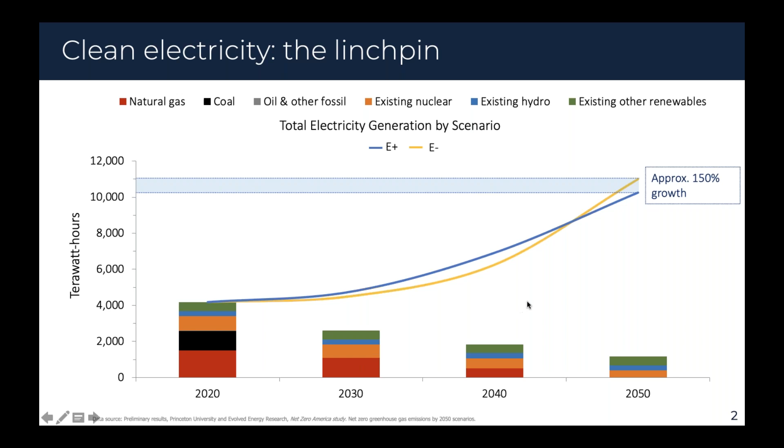So if we take the gap then between the line here, which is the total electricity demand in each of these scenarios in each year, and the remaining contribution from the existing generation sources, what we get is the new amount of total carbon-free electricity generation that has to be added to the US grid over time. So to give this some context, here is an overlay that shows the total 2020 generation today from all carbon-free electricity sources. So all the hydro, wind, solar, nuclear, et cetera, across the country.

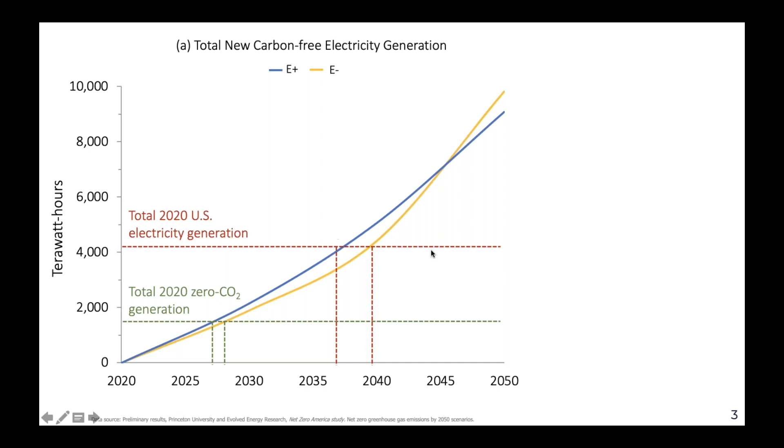And on this trajectory to be on track to a net zero economy-wide goal by 2050, we essentially have to build double all of the existing low carbon generation or zero carbon generation in the country sometime before 2030. So within the next 6 to 7 years, we need to be adding the equivalent of all existing low carbon generation to the grid in the form of new carbon-free electricity sources. Then sometime between 2037 and 2040, we have to basically double the entirety of the current US electricity grid worth of electricity generation, all from new carbon-free sources. And depending on the pace of electrification, basically do that all again by 2050.

Clearly, this is a daunting challenge. If we think about the scale and pace of deployment, it is quite unprecedented, and it is why focus today on the right policy and planning and market environments needed to induce this level of deployment is critical, that we focus on that now rather than delay any further.

If we think about the annual addition rate of new low carbon generation, and we adjust for the different capacity factors or utilization rates of different technologies, such that we take the total capacity and divide by the capacity factor, we end up with an average gigawatt of production. So this is the equivalent of a steady state output at 1 gigawatt of production, which is, for context, about enough electricity to supply on the order of 850,000 average American households for their entire year. So a pretty good sized city worth of homes. Or the average output on a steady state basis of a large nuclear power plant, a single large nuclear reactor.

So if we take the average rate of growth between now and 2050, essentially what we need to be doing is bringing online between 35 and 37 average gigawatts worth of new low carbon capacity every year between now and 2050. And for context, we can look at how we've been doing over the last several years. So the average rate of deployment for wind and solar or non-hydro renewables in the US between 2010 and 2018, after adjusting for capacity factor, amounts to 3.4 average gigawatts per year of sustained growth.

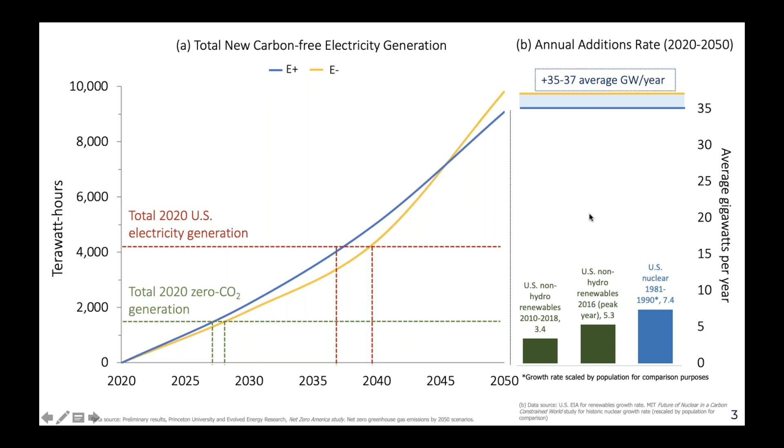If we look elsewhere for precedent, we can see that Germany, on a population adjusted basis, has been growing at about double the rate that we have in the United States for new renewables. So their average rate from 2009 to 2018 was 6 average gigawatts, and the maximum year was 12 average gigawatts.

And if we look at the fastest rate of capacity additions in any individual technology in the US, it was the US boom in natural gas-fired power plants in the 2000s after many states restructured their electricity markets, when we brought online the sustained average of 23 average gigawatts of new gas-fired capacity per year. I think the peak in non-capacity factor adjusted terms was about 50 gigawatts in a single year, which is starting to get closer to the ballpark that we need to see to make the transition to net zero.

Elsewhere, we can look at France and Sweden, which have the fastest sustained annual growth rates of low carbon resources that we can find in the records. And in the late 1970s and 1980s, they brought online the equivalent in population adjusted terms of 26 to 30 average gigawatts. So that's starting to get close to the rates that we need to see.

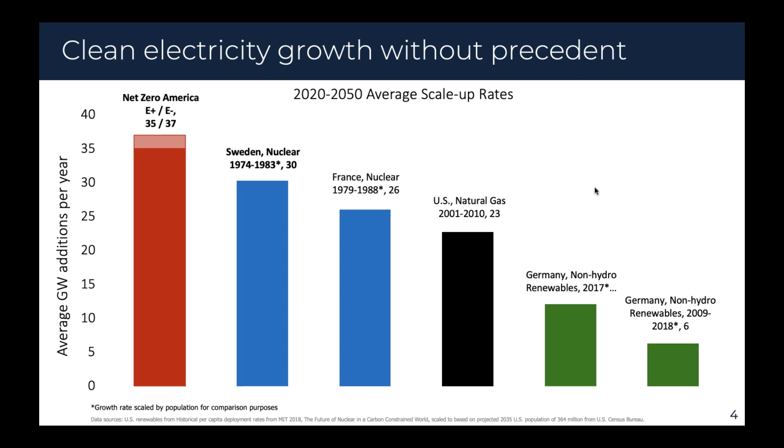Clearly, this is a challenge that requires focused policy and effective market environments that can sustain the kind of scale of investment in clean energy resources that we need to be on track to these sorts of ambitious climate and clean energy goals. And there's really nothing that we've seen in the past that quite matches that pace of growth. So we need a step change acceleration in our transition towards clean energy sources, or we'll fall increasingly behind these carbon-free goals.

Now for some good news, which I think many of you know, the cost of wind, solar, and lithium-ion batteries has plummeted over the last decade. And that is, I think, largely to thank for the kind of ambitious goals that we now are comfortable setting in our electricity sector, contemplating 100% renewable or 100% carbon-free or clean electricity systems.

So just in the last decade, really from 2009 to 2018 to be precise, since this is starting to get dated by a couple of years, we've seen basically a 90% drop in the cost per megawatt hour of solar, 70% drop in the cost per megawatt hour of wind, and a nearly 90% drop in the cost of lithium-ion battery packs per kilowatt hour of storage capacity. And that is just a remarkable shift from where we were just a few years ago, when these technologies cost substantially more than other available electricity sources.

If you follow these energy discussions, like most of you I assume do, I'm sure you've seen these comparisons that note that wind and solar have now fallen in cost substantially, such that they are lower than the cost of new gas or certainly coal-fired power plant construction on a levelized cost basis, and are increasingly zeroing in on the levelized cost of continuing to run existing coal-fired power plants in the United States.

And I used to think this was sort of the tipping point at which we would see solar and wind take off without sustained additional policy support and effectively take over the system. I mean, if solar and wind are cheaper than gas or coal or nuclear, then shouldn't they scale to take off and take over the whole market?

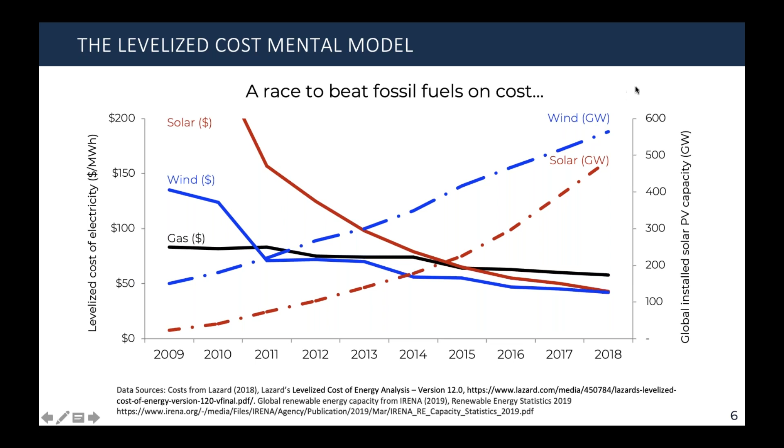Unfortunately, this is an incomplete comparison, as I'll explain in a moment, and it leads to an interesting riddle, which was recently posed by David Olsen, one of the members of the CAISO Board of Governors, who commented in a recent article in Utility Dive that counterintuitively, it can be more expensive to add cheap solar to the grid than to add expensive geothermal, which maybe should be thought of as sort of an ancient koan or riddle.

It's quite an interesting statement, and one that I'd like to unpack a bit further to help us explain why it can often be better or cheaper to add a more expensive resource to the system on a levelized cost basis than to add a cheaper resource like solar or wind.

And the reason I like to say an analogy is that comparing the cost of wind or solar power to the cost of a nuclear plant or the cost of a coal or natural gas plant is a little bit like comparing the cost of a banana to the cost of a burger when you're trying to decide what to eat. Cost is a relevant piece of information. It's good to know that the banana costs less than the burger. But that's clearly not all of the information you need when you're trying to decide what to eat.

If you ate only burgers, I think your doctor would yell at you. And if you ate only bananas, they probably would too. We need a balanced diet, of course, that consists of a variety of different foods and nutrients. And in fact, the more of a particular nutrient we get, say the potassium in a banana or the protein in a burger, the less valuable it is to continue to consume that type of nutrient.

And so the relative value of different foods depends on everything else you're eating and the magnitude or degree at which you're consuming different nutrients. And so they each have sort of a diminishing value in your diet. Much is the same with the electricity system, where we have a variety of different technologies, each of which plays slightly different roles in our overall electricity diet or our clean energy portfolio.

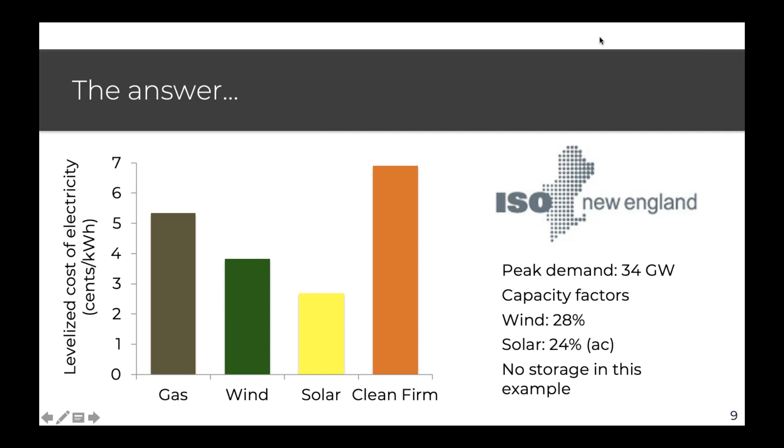And let's take this simple model. This is not the model I use in my research. It's a simple spreadsheet model we can use to kind of unpack some of these dynamics. So it doesn't include things like energy storage or demand flexibility or any of the ramping constraints on thermal power plants. But let's just take a snapshot of every hour of the year.

And we'll require the model to increase the share of clean energy, much like a renewable portfolio standard or clean electricity standard would require in each of these states. And so in the initial example, we'll set that clean energy share requirement to 20%. And so the model will pick enough solar or wind to meet 20% of annual electricity demand, accounting for curtailments. And we'll assume that gas generation fills in the remainder in each of the hours when solar or wind fall short of meeting all of our demand.

So in this case, you can see the hourly demand profile for the ISO New England system across the year, with some cold snaps in the winter and then some higher peaks in the summer during hot, muggy periods when we're all using our air conditioning in the Northeast.

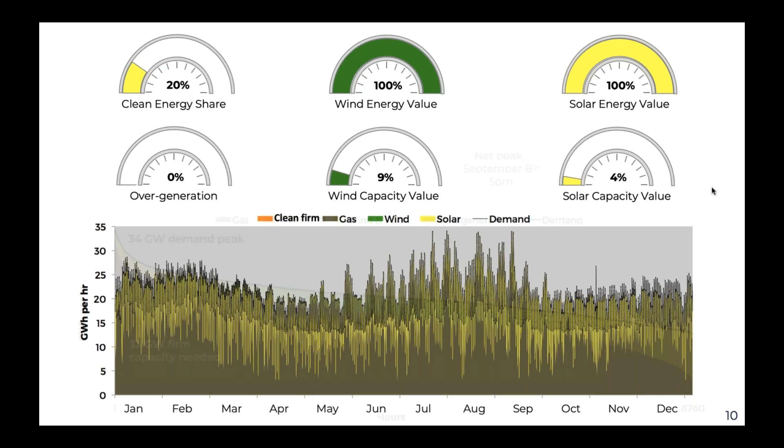I have a variety of dials up on top here which show the relative value of wind and solar as they increase their capacity. And before I note those, let's just say this kind of hourly profile is somewhat difficult to look at. So let's transform it into what we call a load duration curve, which just reorders each hour of the year from highest to lowest demand.

So that instead of looking at them in chronological order, we look at it in order from the peak demand, which is 34 gigawatts on one of those hot summer days, all the way down to the lowest demand hour, which probably occurs overnight on the weekend and in the spring. And you can see now the shape of the demand curve.

And then the green and yellow slice is the portion of that demand that is met by solar or wind. And I've just combined them together here into one slice. And then you can see the brown is the remaining generation we get from gas. So the goal over the next few slides is we're going to try to increase that green and yellow slice and reduce the gas share.

So first we have the dials up top here, and we have a couple different sources of value for wind and for solar. So first we see the energy value at the top, which starts out at 100%. And by 100% energy value, I mean that every megawatt hour that the next solar or wind farm added to the system generates will displace 1 megawatt hour of natural gas.

So it has an energy saving value or fuel saving value equal to the operating cost and fuel cost of that natural gas. So that's what a 100% energy value means. Every megawatt hour of renewable energy displaces a megawatt hour of gas and the fuel and energy costs associated with that gas.

Then we have the capacity value dials, which show for every 100 megawatts of wind or solar capacity, how much do I reduce the need for firm capacity in the net peak period? So the total peak demand minus the contribution from wind and solar, which in this example occurs on September 8th at 5 p.m. Which, because it's in the evening, solar has a very low capacity value.

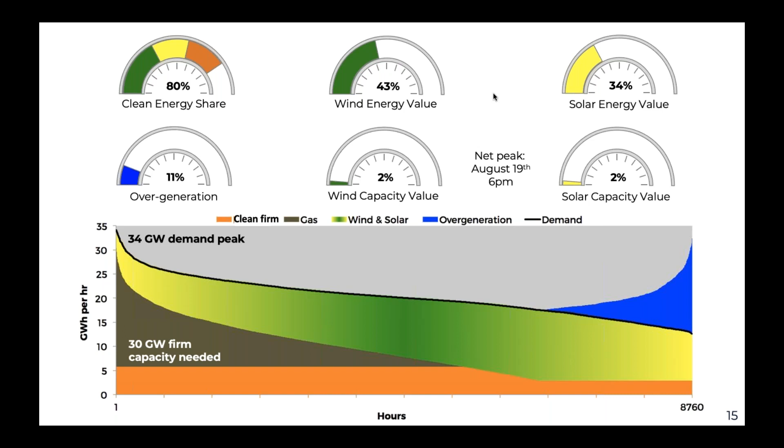We take a step back from this simple example. We think about the range of options that we have available to us. We can think about what essentially ends up being 3 different categories of technologies, or 3 pieces of our overall energy diet that we need to make sure that we fill. This is an attempt to replace the kind of conventional baseload, intermediate, load following and peaking kind of framework that we often use to classify thermal power plants based on their techno-economic characteristics and their ability to meet different slices of the load duration curve throughout the year.

In a variable renewable context, that is not really the relevant distinguishing factor. And in fact, a baseload plant that can't ramp down may be less valuable, for example, and we need a different taxonomy, different mix of resources to fill the low carbon electricity needs. So in our 2018 paper on the role of firm low carbon resources, we introduced this new taxonomy, which groups the resources into 3 categories. The first are fuel saving variable renewables. So here's where wind and solar PV, as well as run-of-river hydro plants fit in.

And these are technologies that we classify primarily as fuel savers because, as you saw in the last example, at high penetration levels, solar and wind and run-of-river hydro don't generate a lot of energy during the periods when you need the most firm capacity. So they have very little capacity value, but they do have a large amount of fuel-saving energy substitution value. And so we think of them primarily in this role as fuel-saving resources.

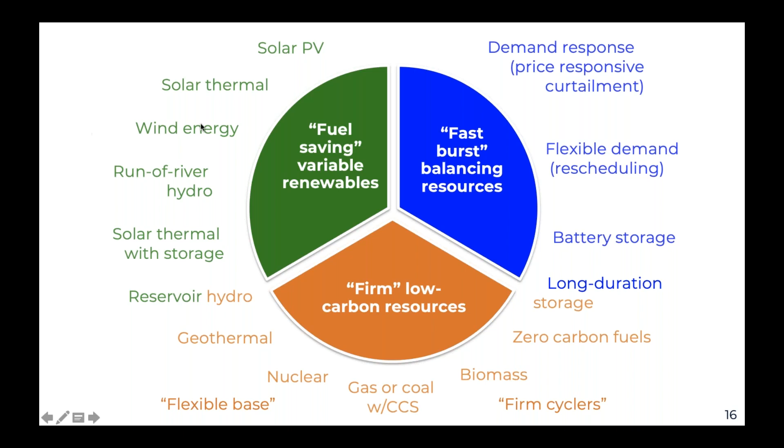Here I show them as equal sized triangles, but in reality, their relative balance is going to change depending on the system and the weather context and the relative cost of these technologies. So if we're going to see each of these play a big role, what we have to see is two things. One, a continued race between the declining cost and the declining value of wind, solar, and batteries.

So these technologies are going to play a huge role. They're cheap, they're getting cheaper still, and they're going to play a substantial role in decarbonizing our electricity system, especially over the next decade, and continue beyond that as well. But the ultimate role of wind and solar and batteries will depend on whether their declining cost exceeds their decline in value as we deploy more and more of them in the system.

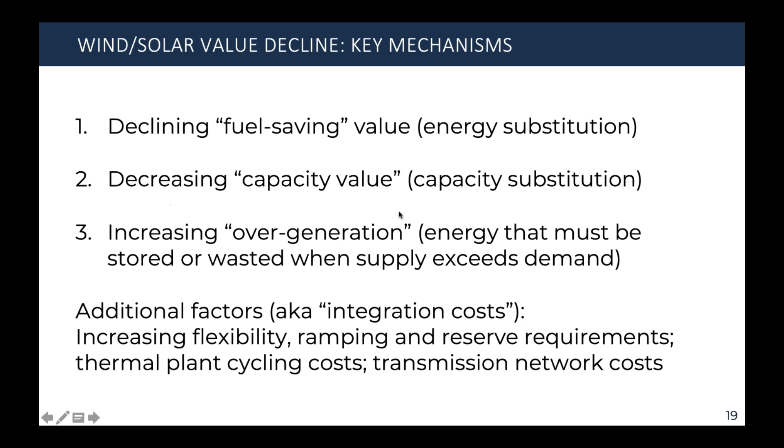But as many studies have found, these are relatively modest costs on the order of a few dollars per megawatt hour in most cases. Whereas, as we saw previously, the decline in fuel saving and capacity substitution value can be on the order of magnitude, or an 80 or 90% decline in these values as we reach high shares of wind and solar. So these are really the governing factors, the decline in value rather than the increase in integration costs.

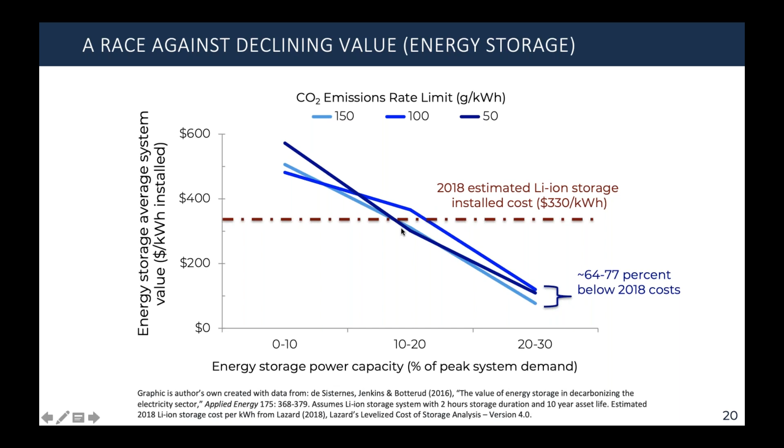And so to reach 20 to 30% of peak demand, which is sort of the scale at which we have open cycle gas turbines or simple cycle gas turbine deployment in the US today, we would need to see solar or lithium ion costs continue to fall on the order of 65 to 75% below 2018 costs. Again, that's not impossible. Solar and wind and storage costs are expected to continue to fall. The question is how rapidly will cost decline relative to value?

Then there are several mechanisms that drive this decline as well. One is that there are sort of niche markets for storage, like providing frequency regulation or reserves, which have high value but are relatively small markets, and so those fill up quickly. The second is a need for increasing energy storage duration or capacity in order to maintain the capacity substitution value. So if you want to displace the first open cycle peaker plant that might only run a few hours of the year, for example, you might only need to have 2 to 4 hours of storage duration to replace that infrequently used gas plant.

But as you start to eat down into the gas capacity further and further, you'll find power plants that run for longer periods of time and more frequently. And therefore, if storage is to displace their capacity, you need to have 8, 10, 12, 16 hours of storage duration in order to continue to displace the capacity from those technologies.

The third is a decline in the energy arbitrage or buy-sell spread that storage earns much of its value from. So storage is effectively making money by buying electricity when it's cheap and selling it when it's expensive. And that difference is the value that helps pay for the cost of the storage. And then as in any arbitrage opportunity, the more people who buy low, the higher the low price gets. And the more people that sell high, the lower the high price gets. And so the more storage we have in the system, we get a compression of this buy-sell spread, and that reduces steadily the energy arbitrage value.

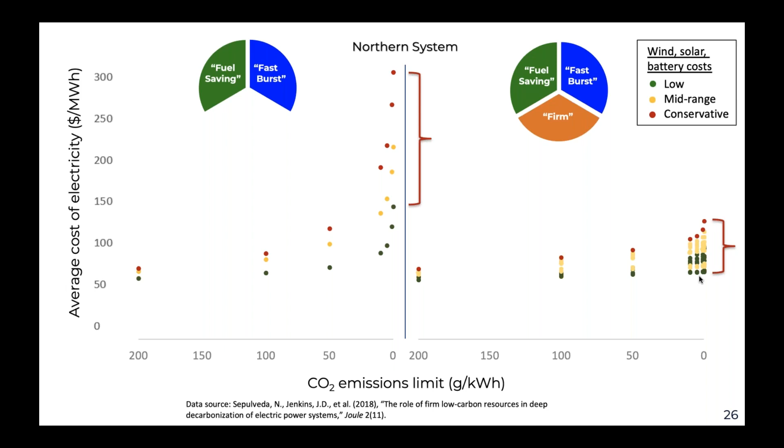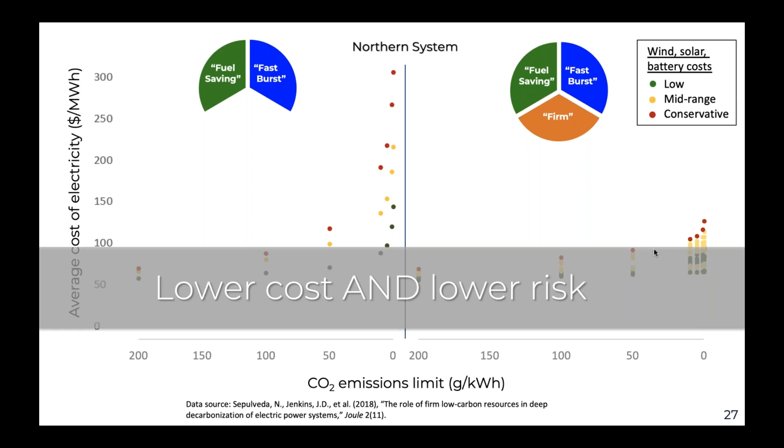So we can see that these are lower-cost cases, and the total spread in cost across technology scenarios is substantially reduced, meaning we're much less dependent on substantial breakthroughs in cost or performance in order to achieve our zero-carbon goals affordably. In short, having one or more firm low carbon resources translates this into a much lower cost and lower risk transition to a zero carbon system, in which the kind of technological uncertainty we face today about which technologies might play this firm low carbon role in the 2030s or 2040s and how cheap wind and solar might get in the long term is much less consequential to the affordability of our transition to 100% carbon free.

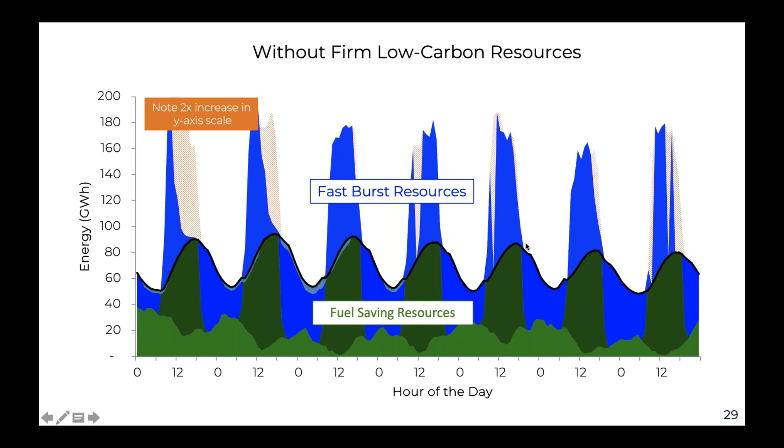When we try to push wind, solar, and batteries, not just to be stars in an overall team, but to play roles on the court that they're not well suited to, we stumble and fall short of our goals. When we have a full team of low carbon resources, including one or more firm low carbon substitutes for natural gas and retiring nuclear, we can readily win the low carbon game. So these firm low carbon resources complete the team.

And as I mentioned, there are several options, all of which are relatively immature or more costly than we would prefer today. And that means that even as we deploy more wind, solar, and batteries over the next decade, we also need to use the same kind of policies that were consequential in driving down the cost and improving the maturity of wind, solar, and batteries over the last decade, and apply those same tools to improving and completing our team of firm low carbon options over the coming decade.

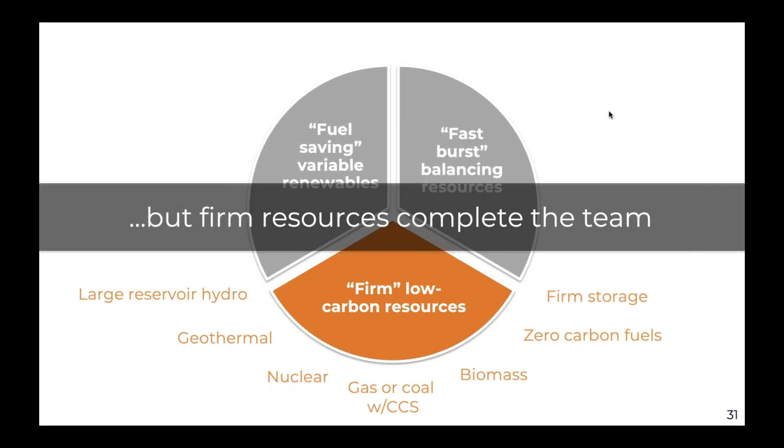We could combust hydrogen at high blends or synthetic methane from renewable or low carbon sources in existing gas plants converted with new combustors, or new build natural gas plants designed to burn high hydrogen shares.

In regions that have access to hydropower with large reservoirs, like Quebec, or Sweden and Norway in Europe, these large reservoirs can also act as firm low carbon options. So for those in the Northeast that are considering connecting to Hydro-Quebec, for example, that may be a firm low carbon substitute available on a regional basis.

Enhanced geothermal energy systems offer a way to expand the availability of geothermal resources across particularly the American West by using techniques similar to hydraulic fracturing for shale oil and gas to stimulate porous heat transfer opportunities within hot rocks drilled down to depths across much of the West.

And if we can unlock this technology cost effectively and incorporate the kind of learning and experience from the oil and gas sector to make this a cost effective technology, it could ultimately generate more electricity than our nuclear power fleet today and could contribute particularly substantially in the American West, but is at an early demonstration stage today and in need of additional policy support.

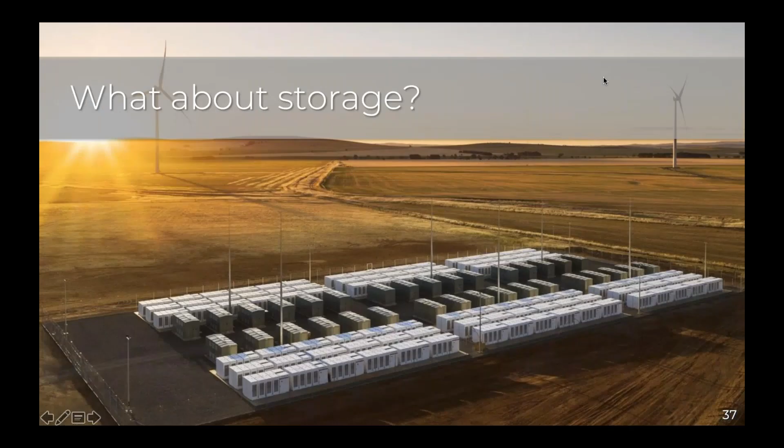Finally, what about energy storage? Some of us paid attention to news this week of Form Energy's announcement of a very long duration, 150-hour energy storage demonstration that Great River Energy is going to deploy in Minnesota. And of course, we see a lot of deployment now, multi-hundred megawatt lithium-ion batteries coming onto the grid. So why don't we just use more storage to deal with the intermittency and variability of wind and solar?

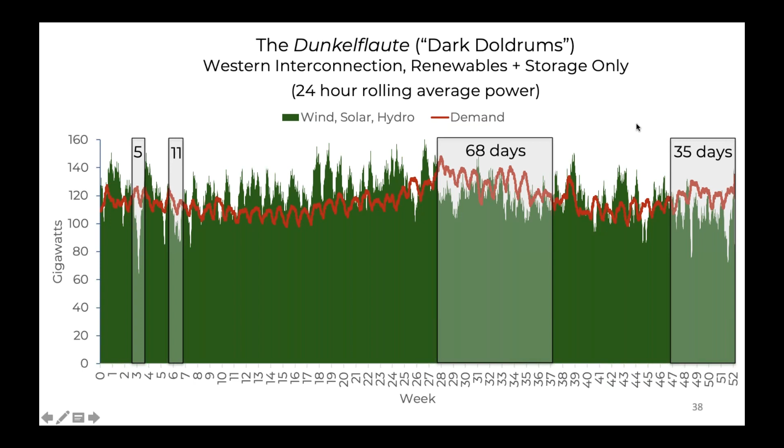And this is an enormous amount of storage. It's on the order of 33 terawatt hours, which if you think about that in terms of lithium-ion battery packs, would be the equivalent of 2.4 billion Tesla Powerwalls, which is the home storage system that Tesla offers. So think about the scale that you could deploy in your garage. We would need on the order of 2.4 billion of those to have that scale of capacity.

So my message on long duration storage is that this is a possible option, but what it's going to need is a very different kind of storage than the batteries that we're deploying today. As we show in our research, lithium-ion batteries play a role as a fast burst technology that is most useful for balancing the variability of wind and solar within a daily time frame.

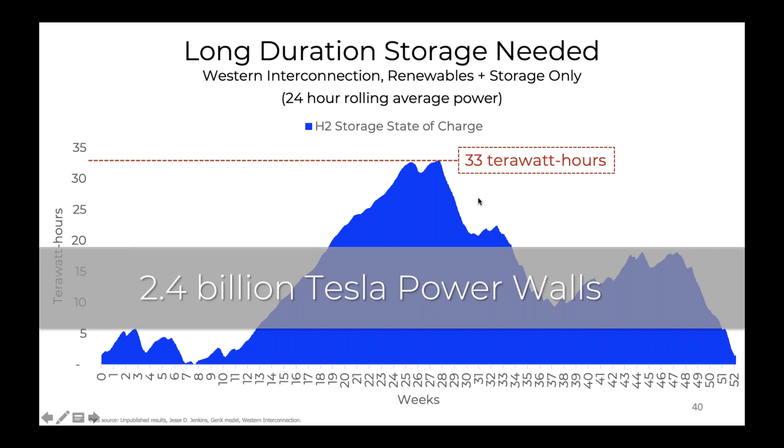But if we want storage to displace the role for firm generation and enable a 100% renewable energy system, we need a very different type of storage entirely, one that is designed for much more infrequent utilization. In this example, we have only a couple of cycles for this capacity throughout the year. Some of it is even cycled once. And so it has to be very, very low cost per megawatt hour of storage capacity. And it needs to be able to sustain output for many days or weeks at a time.

And this is where the sort of long duration electrochemical technologies that Form Energy and others are working on come in, or the underground hydrogen storage options that others are considering in Utah and elsewhere, where we have salt caverns that could be made very large to store hydrogen or compressed air. Or potentially thermal storage options that could offer these very low costs.

I have some forthcoming research out on this topic that we'll be happy to share in a few months. But suffice it to say, this is a technology that has to be very different from the batteries we're used to and are seeing deployed at scale today. It has to cost on the order of a few dollars per kilowatt hour for storage capacity, maybe in the low tens of dollars per kilowatt hour, relative to lithium ion, which costs several hundred dollars per kilowatt hour today. So I'll leave it there.